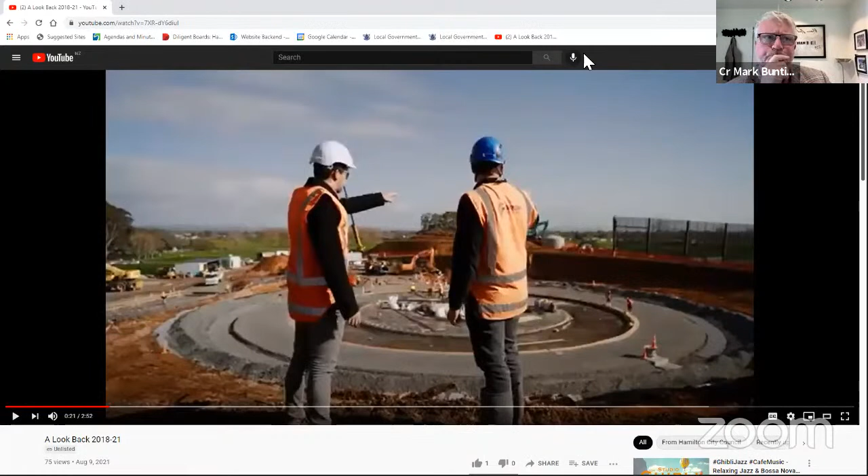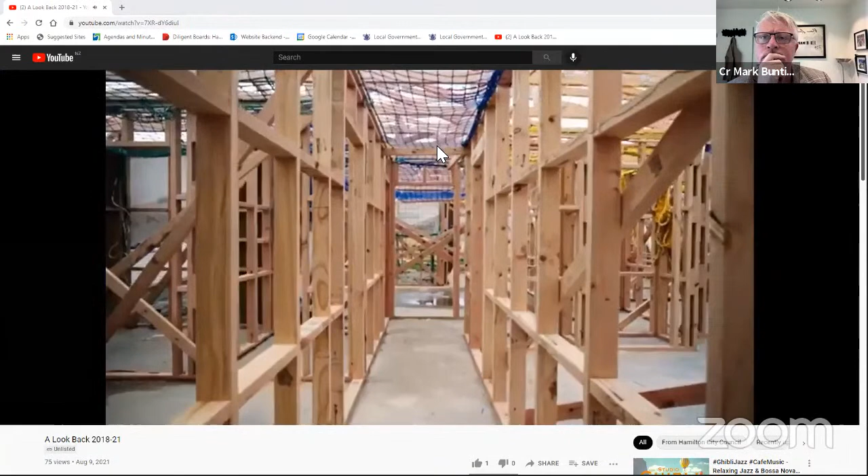Smooth. Mark, could you hum a tune while this is playing?

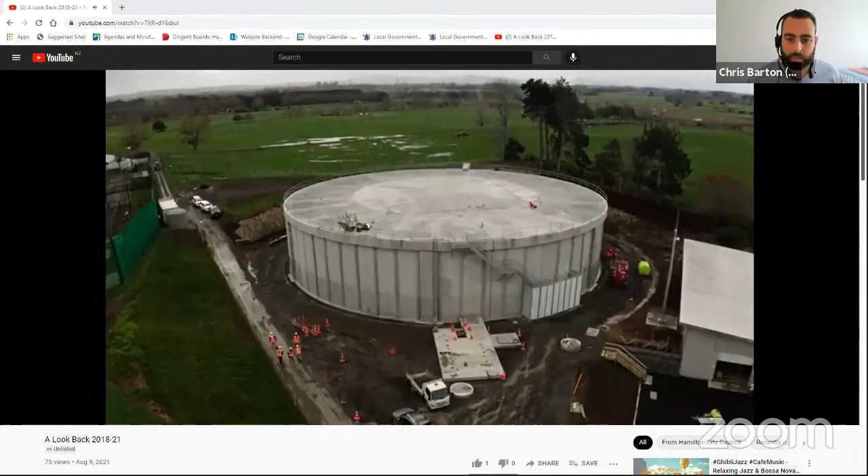I take it, Chris, there's supposed to be some sound. Yeah, sorry, there's meant to be some audio attached. So as we're saying, we're trying to be a bit experimental in this different environment. We'll send out the link to the video separate to the meeting, so that you've got visibility. And I think following today or later on in the week or at an appropriate time, we're planning to share this through some of our council social media channels, etc. as well, to provide some visibility to the community.

So that's in terms of the looking back document, which is attached as attachment 1. I'll leave you to work through that in your own time, but I'll pass you back to Ian, happy to take any questions once Ian's presented the other component of the report. Thanks, Chris. Appreciate that.

So moving on to the more traditional capital monitoring report. What I will start by saying is that what we're presenting this morning is the 12-month draft results. I use the word draft deliberately because, as we know, the annual report is currently subject to Audit New Zealand. The auditor is in the building - not physically today, are they? But they're on site and completing that audit.

So the results are drafted for such time as they complete that audit, and we will report back to you on when that comes out.

I want to reiterate what Chris said in his presentation: if we look back over the previous 3 years, the investment in assets across the city at 590 is a huge 130% increase over the previous 3 years from the old LTP. It just talks to the discussion we've had in the chamber and through various meetings over the last 3 years about the sheer size of the growth happening in the city. So that is quite a significant increase.

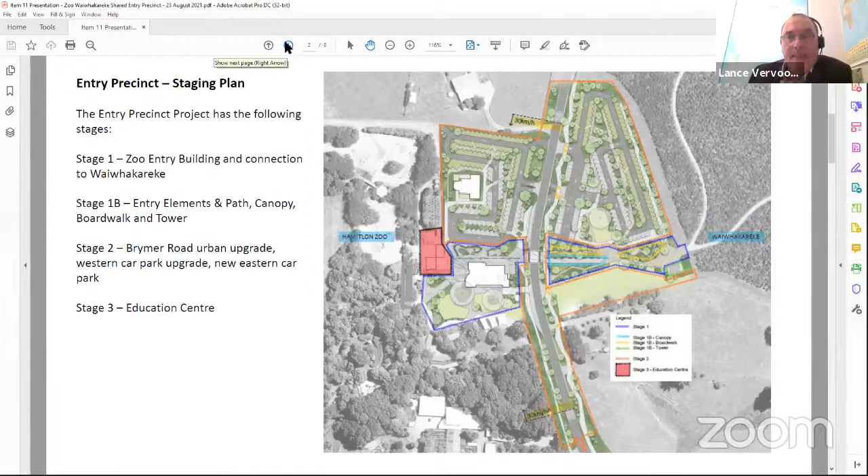In stage 1, this is just a few shots showing how we're going - things are progressing pretty well. There are a few photographs of the building just before lockdown. You can see the shape of the new arrival area, visitor centre and cafe, some of the panelled wood going into the overhang, and the comparison with the artist's impression, along with some of the outside areas related to that arrival area.

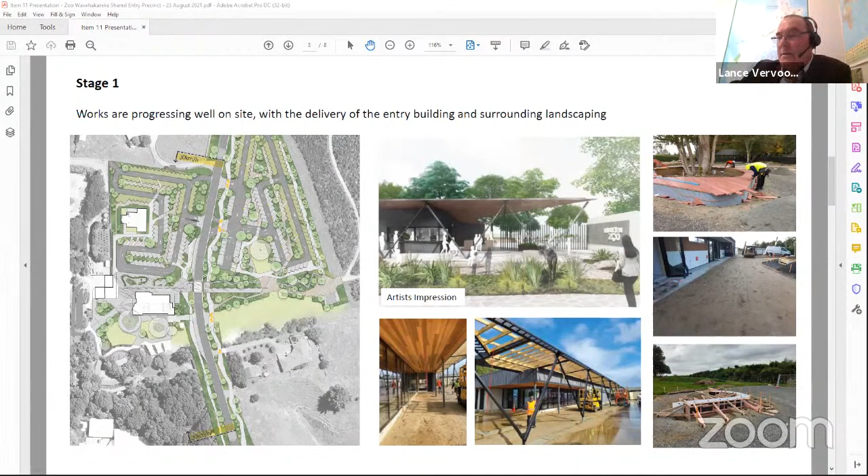So if we go to the next slide, this will give more detail around stage 1B. Number 1 is a pathway connecting to Waiwhakareke. It's got some entry elements such as marker posts, a Waharoa gateway, which is a Māori carving, and also wayfinding.

So for number 1, as you'll see when you've read the report, we've managed to get $620,000 of external funding of the $1.8 million. That's what would actually fund the elements on the eastern side of the road.

What's not funded are 2, 3 and 4: the walkway canopy over the walkway is number 2, and also the immersive boardwalk area at the top of the walkway, which has a whole bunch of different types of vegetation that replicates what's in the park, so people get a good view of what they're going to experience. We're also going to have QR codes there, so there'll be technology where people can use their phones to get more information and the story.

And then the tower is number 4. Now it's not just a viewing tower - it's also got some elements below it for people to wash their hands, for education classes that will come over with Ken and his team from the zoo. They'll be holding education classes in Waiwhakareke, so it's actually got a number of different elements to it.

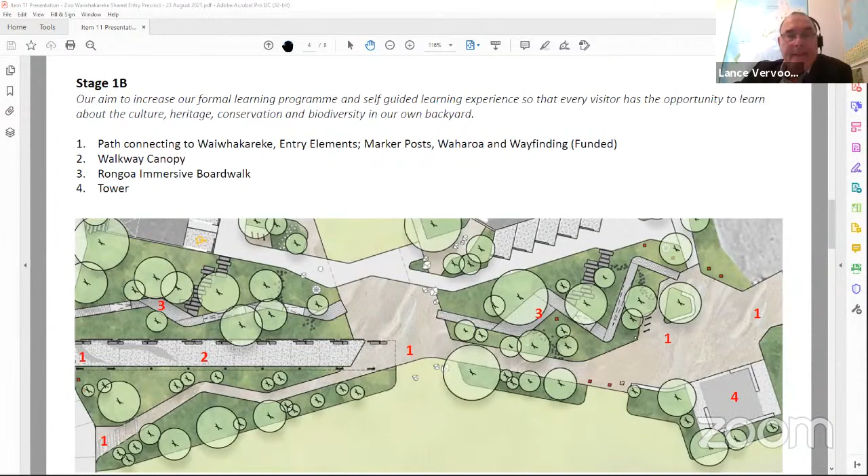This shows the path connecting to Waiwhakareke, those entry elements I talked about with the Waharoa. You're probably aware there's one in Te Parapara Garden, and there's also one at the Waikato Stadium. And wayfinding signage, things like that, so you can see those marker posts. They could actually be pou, and we'll be working with Mana Whenua and others around those.

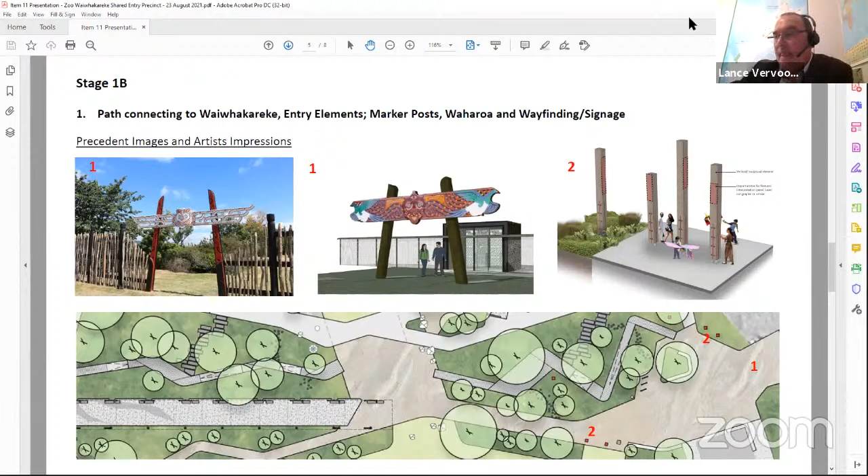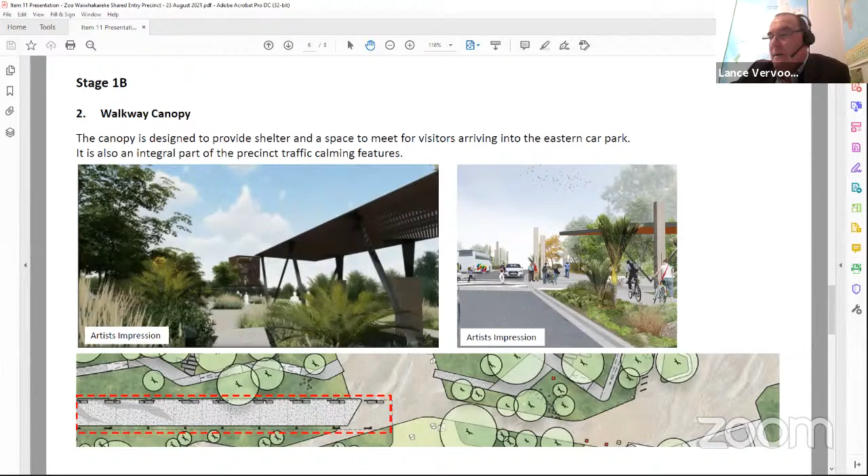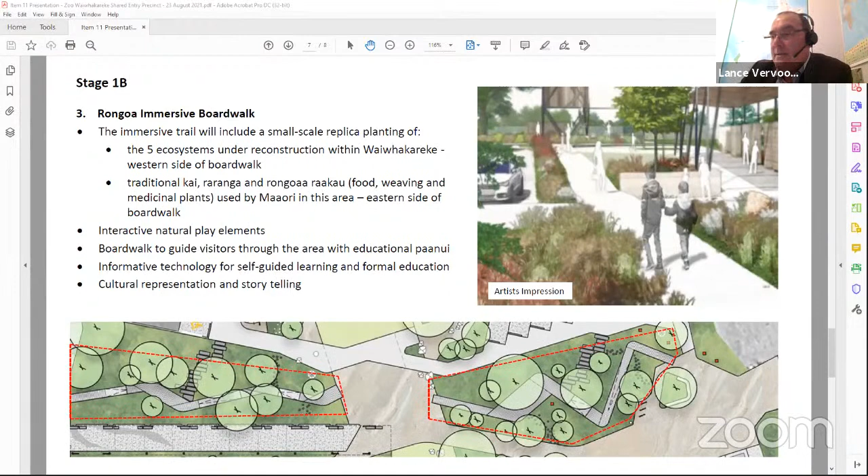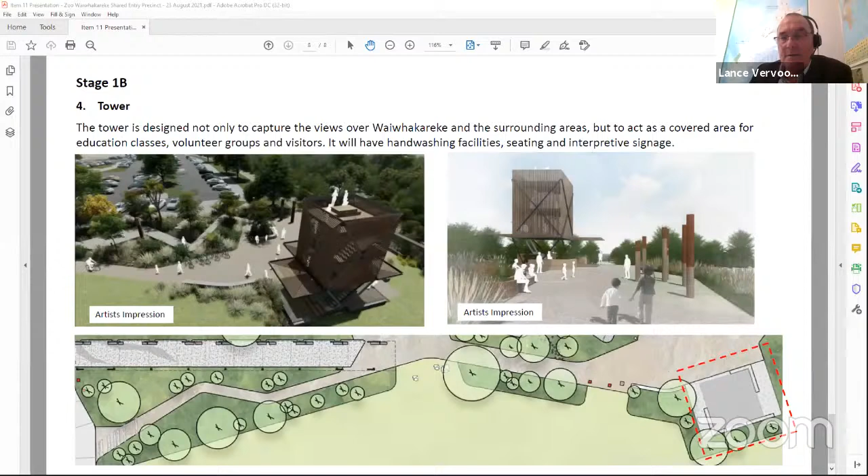Coming to the last slide, this shows the tower, which also has overhangs for education groups to have classes there, and for people to wash their hands after they've been down in the park - volunteers or others who've been touching plants and different things. So it's an opportunity for people to wash their hands, which is very important, obviously, with things happening at the moment.